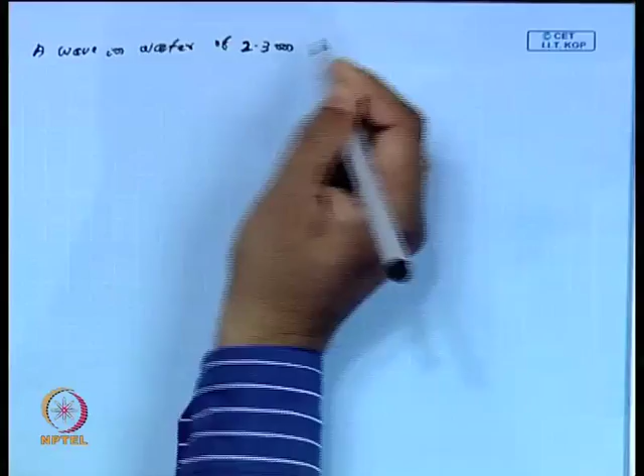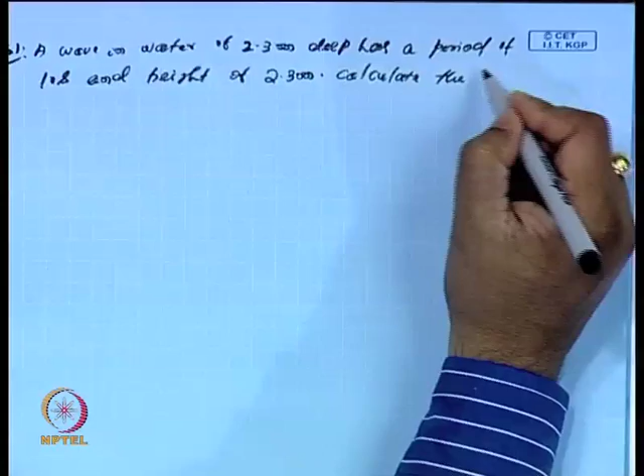Let us start with a simple example, example 1. Suppose a wave in water of 2.3 meter deep has a period of 10 seconds and height of 2.3 meter. Now you need to calculate the wave celerity and length, basically the wavelength. So this is the question.

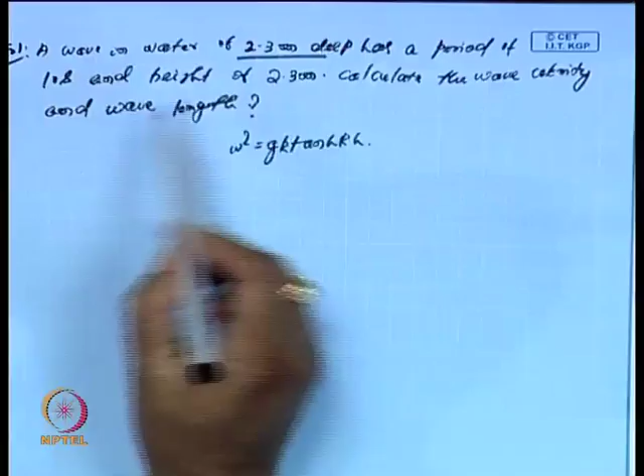If you look at omega square for any wave, the dispersion relation is omega square equals gk tan hyperbolic kh. Suppose the wave is in 2.3 meter deep water, so water depth is very small, and period is 10 seconds. The height is 2 meter. So water depth h is given as 2.3 meter, and capital H, the water wave height, is 2.0 meter, and we have t as 10 seconds.

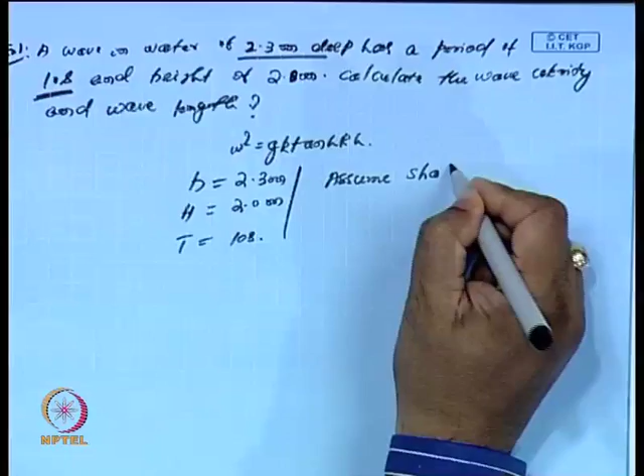If I assume shallow water, I assume this water wave is of shallow water waves.

Then, as per definition, c square equals gh, so c square equals 9.8 into 2.3, and c in meter per second becomes 4.75 meter per second. Since c equals lambda by t, and t is given as 10 seconds, this becomes 4.75 meter per second, which implies lambda equals 47.5 meter. So this is my lambda.

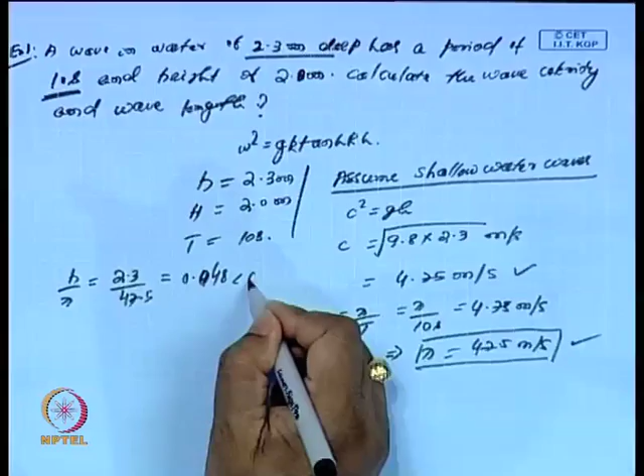So wave celerity and wavelength we have seen. Now I started with the assumption that this is the shallow water case. What happens in case of shallow water? Then h by lambda will be 2.3 divided by 47.5, and this ratio gives 0.048, which is less than 0.05. So the condition is satisfied, which implies this is the case of shallow water waves.

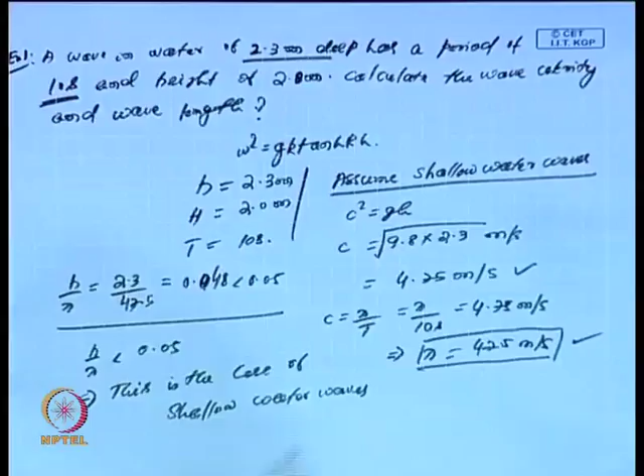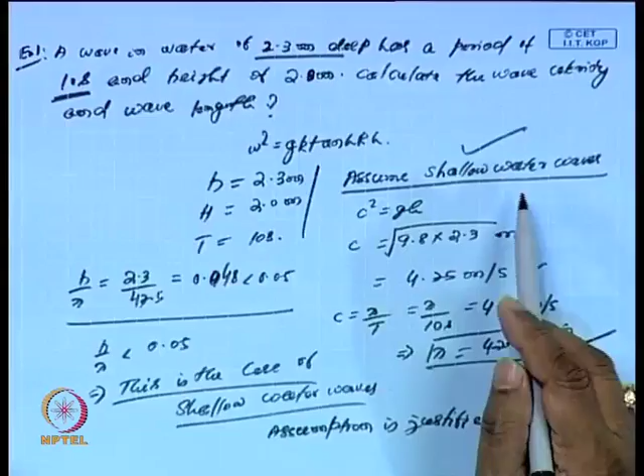So this is the case of shallow water waves. I started with an assumption of shallow water waves, and this assumption is justified. So lambda is 47.5 and c is 4.75, and this is true because the assumption is valid. Because of this assumption, the problem becomes easy; otherwise I would have had to solve the original equation, omega square, but this simplified it to a large extent.

Now I will go to another example, example 2. Suppose a wave in water of 100-meter deep has a period of 10 seconds and a height of 2 meter.

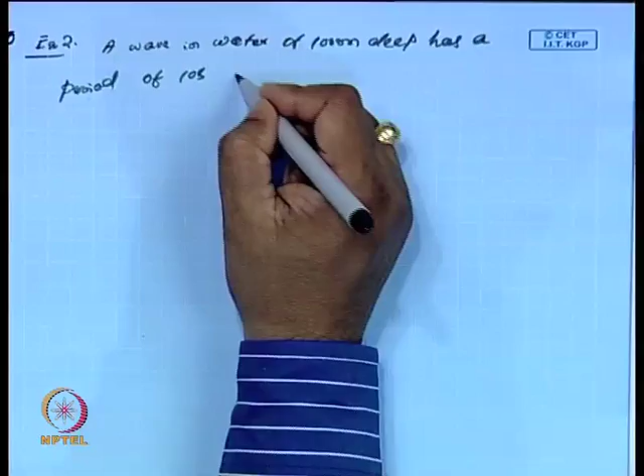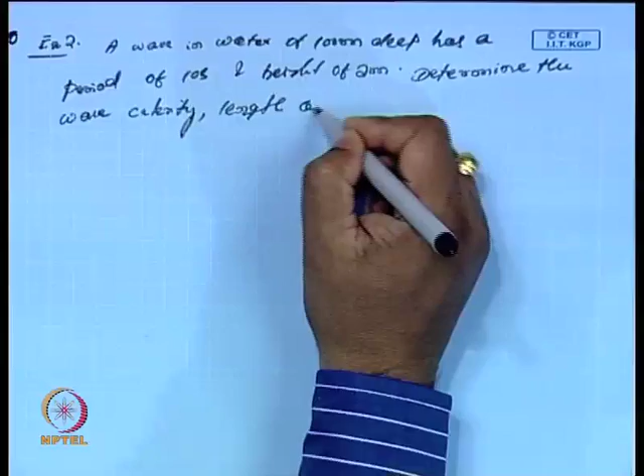Then it says determine the wave celerity, length, basically the wavelength, and steepness. So to do that, I assume because it is a 100-meter deep water, my h is around 100 meter, it has a period of 10 seconds, t is 10 seconds, and height capital H is 2 meter.

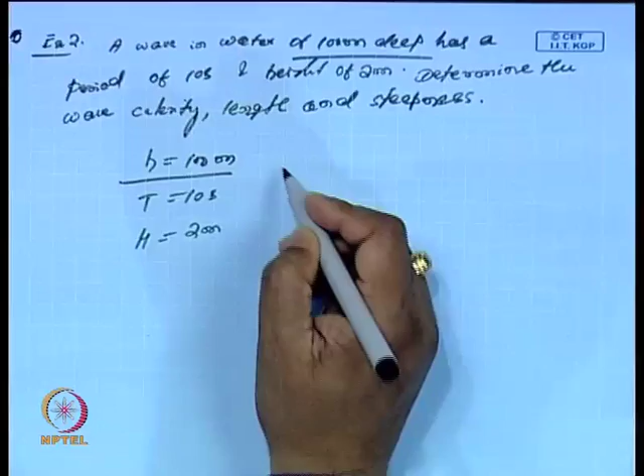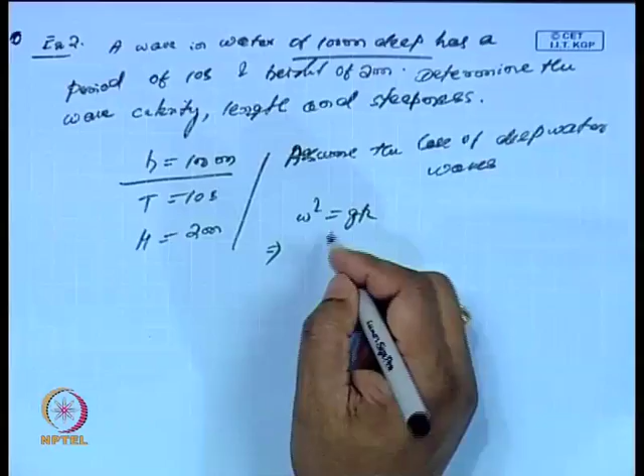So if I assume the case of deep water, assuming the wave motion is in the case of deep water waves, then when omega square equals gk in case of deep water, I can easily get lambda equals 1.56 into t square. If you put omega equals 2 pi by t and k equals 2 pi by lambda, one easily gets this from the equation.

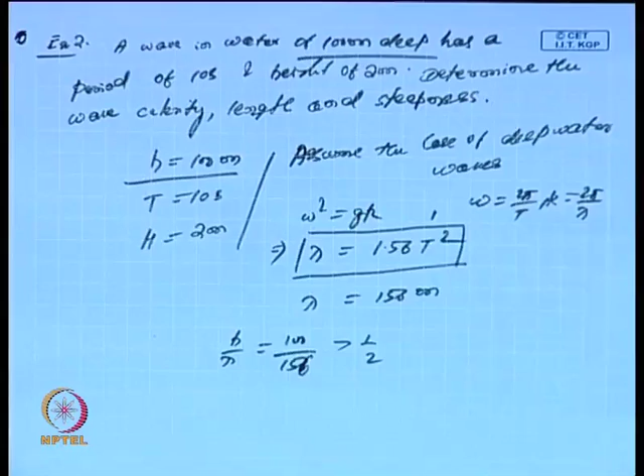I have been given t is 10 seconds. So if I put t equal to 10 seconds, then lambda is 156 meter. And again, if lambda is 156 meter, then I look at h by lambda: h is 100, lambda is 156, and that ratio is greater than half. Hence, this deep water assumption is justified.

Is valid. Now once this is valid, what I have been asked is what is my c. C is nothing but lambda by t, 156 by t which is 10, so this is 15.6 meter per second.

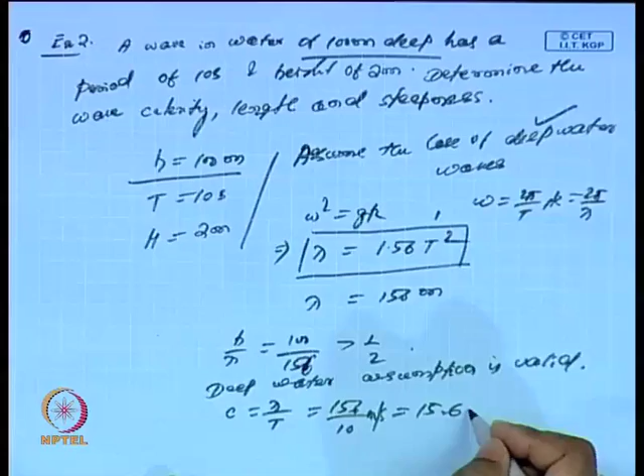Then again, wave steepness, that is your h by lambda. H is given as 2 meter, lambda is 156, and that gives me 0.013.

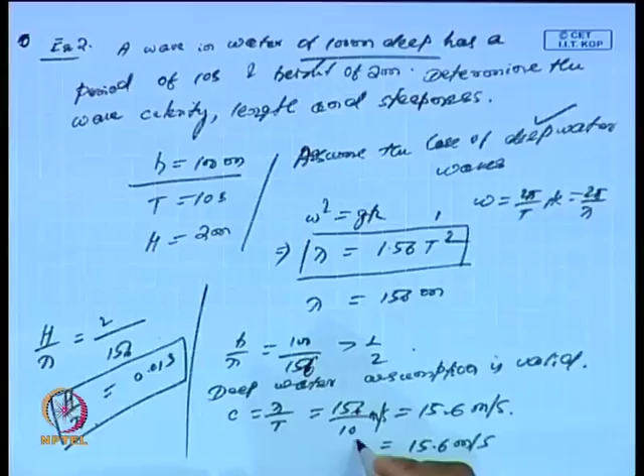That is my h by lambda, the wave steepness. And this is c, so we have c is 15.6 meter per second, and lambda is 156 meter. So initially lambda is this, c is this, and h by lambda is this.

So in these two examples we have seen the assumption of whether it is a deep water assumption. Fortunately we are lucky that our assumption has become justified, so we could easily do this calculation. On the other hand, if this assumption is not valid, this condition will not hold good. In that case, I may have to solve the original equation to find exactly the wave behavior.

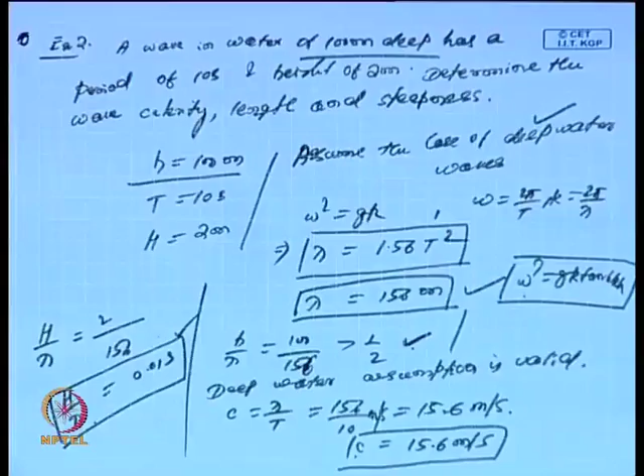I have tried to search the tan hyperbolic relation - this is the water wave dispersion relation. So often we have to approach numerical methods, even though in the previous case it was possible because we could handle it directly, since the assumption of deep water was also a valid assumption.

So now with these two simple examples, I will go for another example where the propagation of a wave is from deeper water to shallow water. Let us see another example of a wave from deep water to shallow water. Suppose in the last two examples we have seen that the wave propagates with no change in water depth.

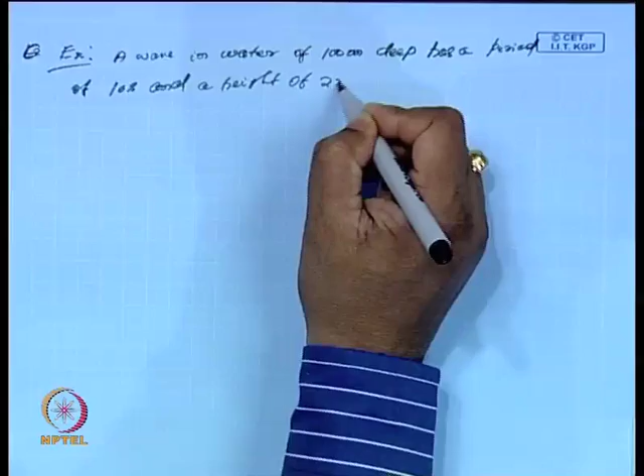Now suppose I have a wave in water of 100 meter deep, has a period of 10 seconds and a height of 2 meter. When it propagates, when it is propagated into a depth of 10 meter...

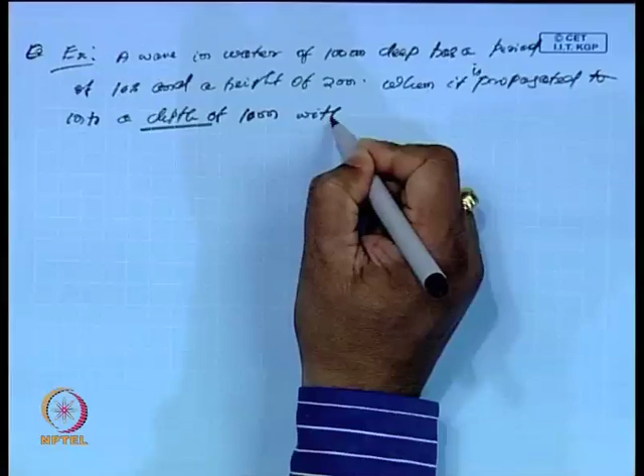...when it is propagated into a depth of water of 10 meter without any refraction, let us determine the wave height and the water particle velocity.

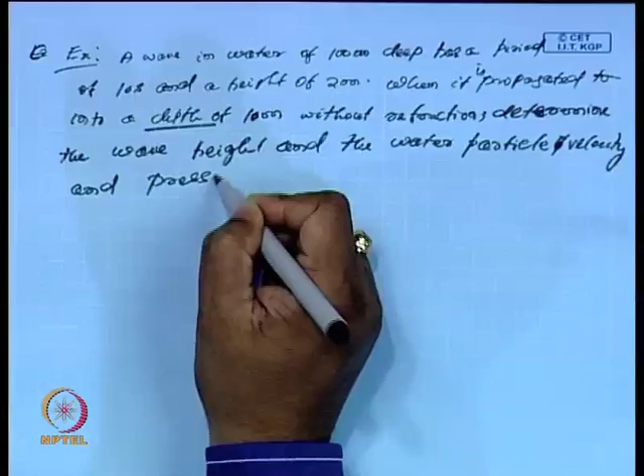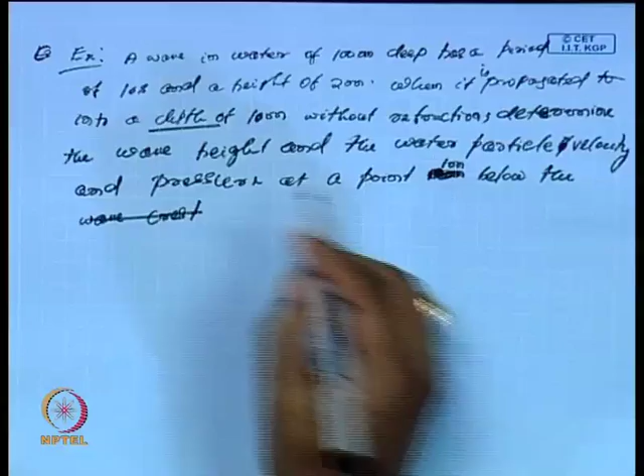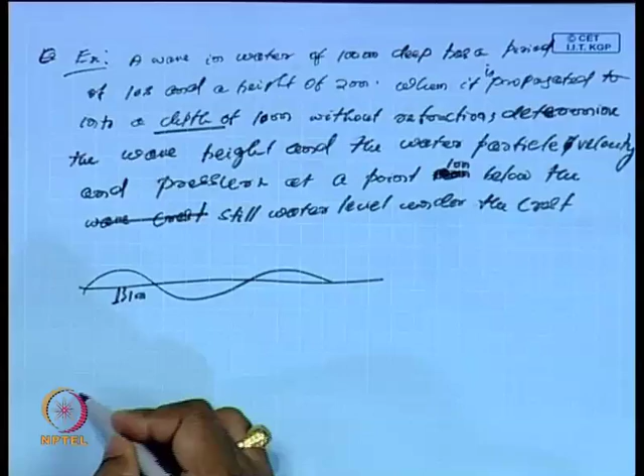Water particle velocity and pressure at a point 1 meter below, sorry, 1 meter below the still water level under the wave crest, under the crest. So that means I am looking at, if this is mean water level, I am looking just at this point. If this distance is 1 meter below the water depth, my initial water depth, so initially the depth was 100 meter, h was initially 100 meter.

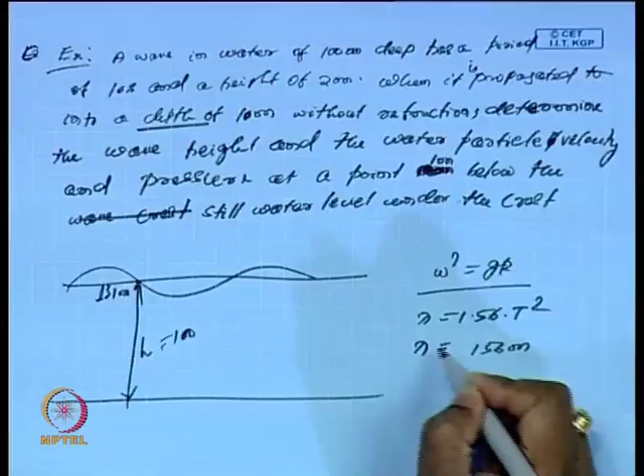So in this case, omega square is gk, assuming this is initially in the deep water wave regime. Then we know lambda is equal to 1.56 into t square, and t is 10 seconds, so it will be 156 meter. So lambda is 156 meter initially, and this wave was propagated.

If you look at this assumption, because I have taken this under the case of deep water, we have just seen in the previous example that this assumption is valid because h by lambda is 100 by 156, which is greater than half. So this is a valid assumption.

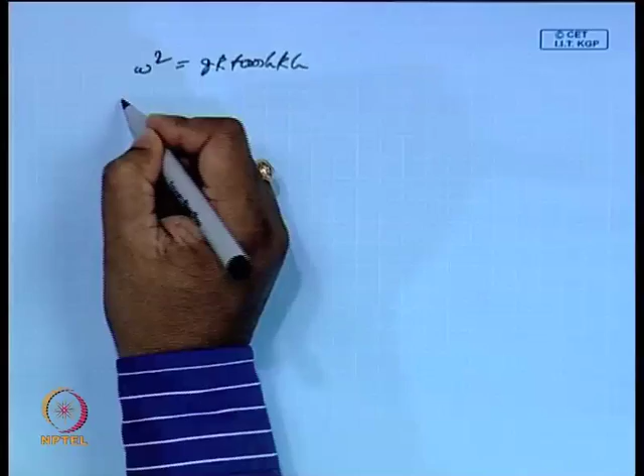Now when this wave has propagated to a depth of 10 meter, what will happen? If we look at our original equation, omega square is gk tan hyperbolic kh, we have been given t is equal to 10 seconds and our h is 10 meter.

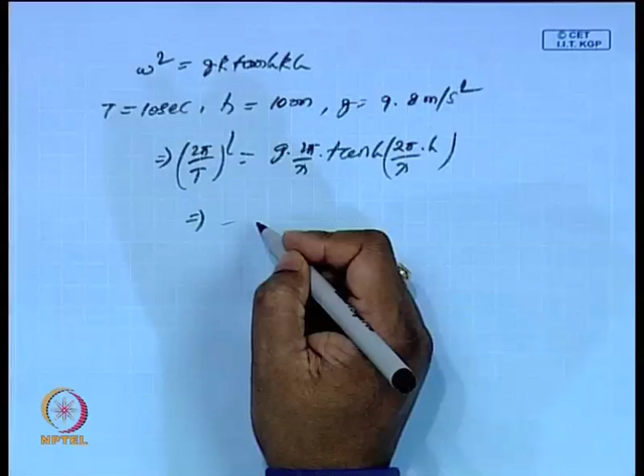If h is 10 meter and g is 9.81 meter per second square, you can easily see if you substitute for t, where omega is 2 pi by t, square is equal to g into 2 pi by lambda to tan hyperbolic 2 pi by lambda into h. If you substitute for t, g and h, and find the solution for lambda, then one can easily see that lambda will be 93.3 meter. This will be lambda.

It can be checked. One can apply the fixed point iteration method or the bisection method to find this lambda by solving this equation, because t is known, h is known, g is known.

Once lambda is known, then we have k is equal to 0.0673, because k is nothing but 2 pi by lambda, and it is in per meter.

That is my wavelength, a wave number, and then my n is, in general, n is equal to half of 1 plus 2kh by sin hyperbolic 2kh, and this gives me, if I substitute for k and h, that will give me 0.873. So, in fact, we know that n is equal to half in case of deep water, where n is equal to 1 in case of shallow water.

So this n itself, the value shows that it is the case of intermediate water depth, 0.873, because it lies between half and 1.

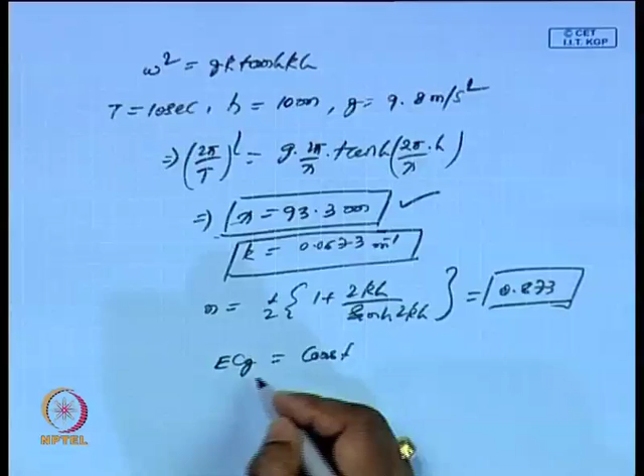So if I take this value, that means lambda n h square at h is equal to 100 meter is same as lambda n h square at h is equal to 10 meter, because initially the wave was in 100 meter deep, and then it has come back to a depth of 10 meter.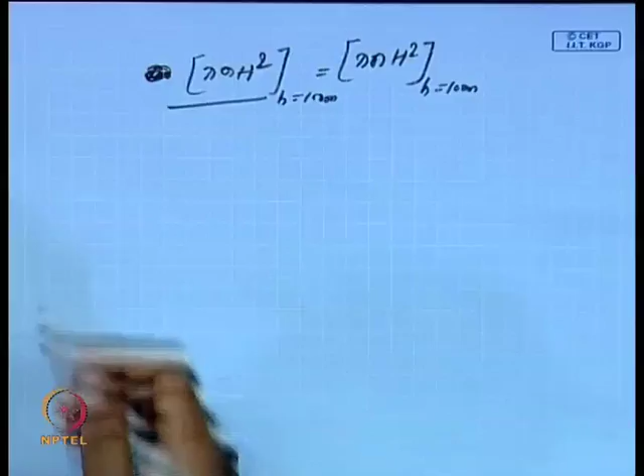So if I substitute, and in case when h is 100, we have seen that this is the case of deep water. So in case of deep water, n is equal to half, and in case when h is 10, we have already seen n is equal to 0.873.

Substitute for n from both sides, and the initial wave height was, we have initial h 100, the wave height initially it was 2 meter, and my lambda was 156 meter. So this was lambda 100, and then I have seen that my lambda 10 is 93.3.

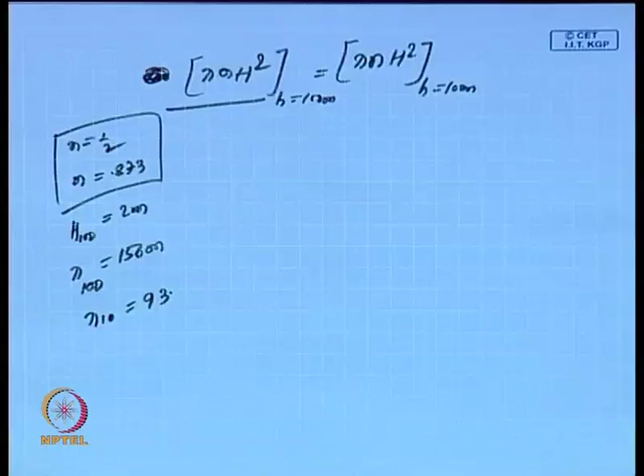So my lambda I have seen is 93.3 meter. So if I substitute these values along with this, then I will get my h10, the wave height at the depth of 10 meter, that will give me 1.97 meter. This is the wave height. So there is a small reduction in the wave height from 2 meter to 1.97 meter. This is what we have obtained by this result, and this is nothing but the conservation of energy flux.

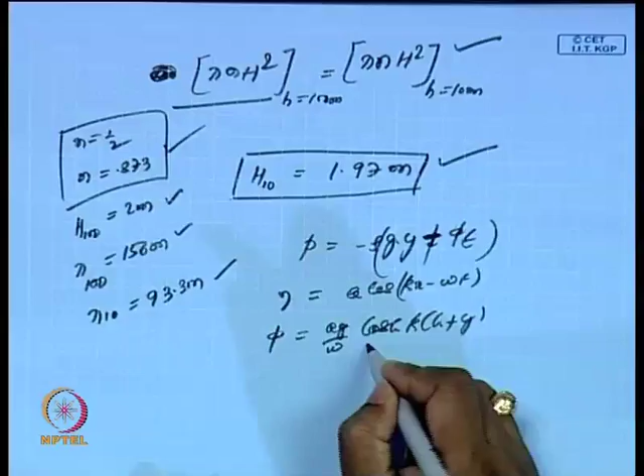And if this is the case, then I have eta is, suppose I assume eta is equal to a cos(kx minus omega t), then my phi will be a g by omega cos hyperbolic k into (h plus y), or a g by omega cos hyperbolic k(h plus y) by cos hyperbolic kh, into sin(kx minus omega t), and then we have this.

If we substitute for eta and phi and p, and again y is equal to minus 1 below the crest, this will give me, my p will give, it can be easily seen that it is 19,113 Newton per meter square. So this will give me the pressure, the hydrodynamic pressure.

And again, if I calculate the horizontal velocity, particle velocity, because phi is there, u is nothing but phi x, and then below the crest, 1 meter below the water surface, this will give me 1.01 meter per second. So this can be checked by substituting for these values, and then one can easily obtain this.

So we have the three examples we have solved. First case, we started with a very simple example of shallow water waves, then went to a case of deep water waves. The third example is very interesting because we are able to know how the wave height changes due to the change in water depth, and also how one calculates the pressure and the components of velocity, particularly the horizontal and vertical components of velocity of the water particles. This is a very clear example.

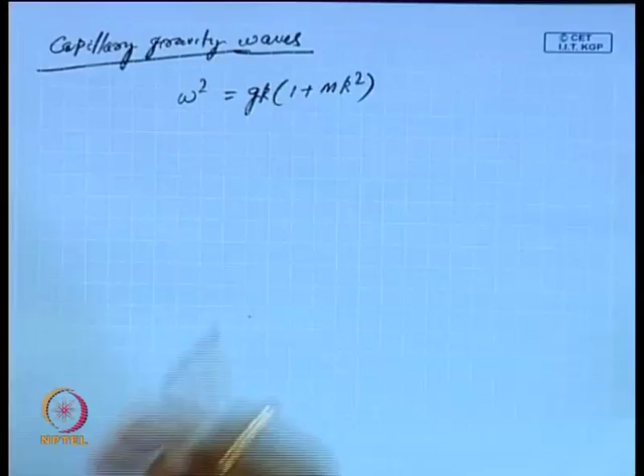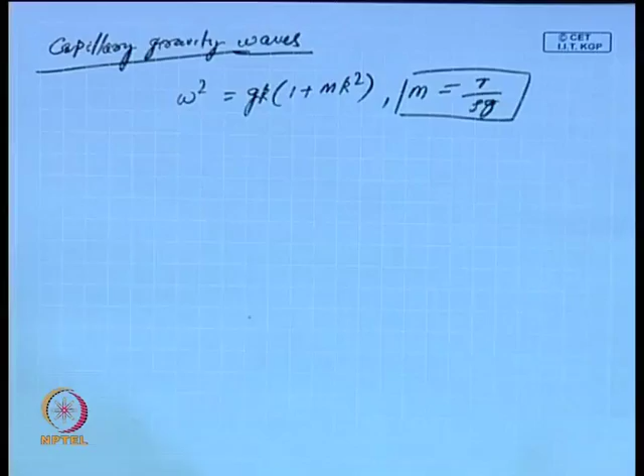The problem is like this: we know that in case of capillary gravity waves, the dispersion relation is omega square equals gk(1 plus mk square), where m is t by rho g. Here t is the coefficient of surface tension, g is the gravitational acceleration, rho is the density of water, omega is the wave frequency, and k is the wave number associated with capillary gravity waves. Sometimes we write this as capital K equals k into (1 plus mk square), where capital K is also omega square by g, or into tanh(kh) in general.

Now, what happens in the case of deep water? When kh is much larger than 1, we get K equals small k into (1 plus mk square). Since k is omega square by g, that gives omega square equals gk(1 plus mk square), and then omega square by k square equals g by k times (1 plus mk square), which can be written as g by k plus gm into k.

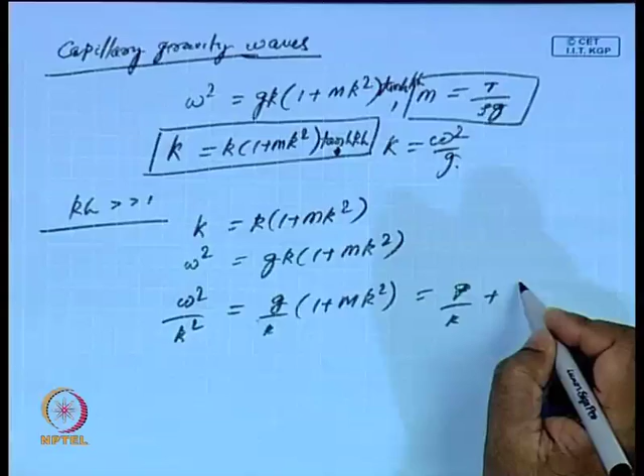So g by k plus gm into k. If I call this c square, what happens to dc by dk? Taking the derivative with respect to k, this gives minus g by k square plus gm. Setting this equal to zero, since c is not equal to zero, dc by dk equals zero gives the optimum value.

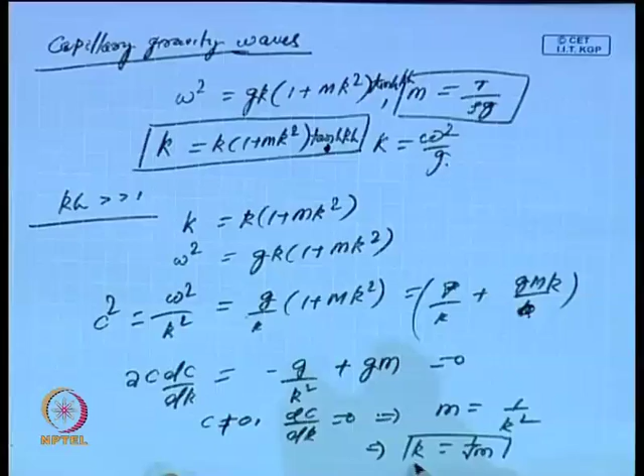Once dc by dk is zero, this implies m equals 1 by k square, which implies k equals 1 by root m. So it can be easily seen that for this value of k equal to 1 by root m, c will attain an optimum — it can be checked whether it's a minimum or maximum, but it turns out that when k equals 1 by root m, c becomes c minimum.

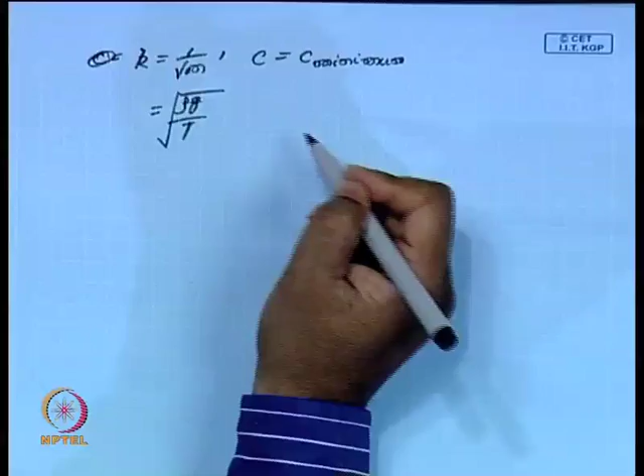This can be checked: once k equals 1 by root of m, m is t by rho g, this gives k equals root of rho g by t, so that c equals c minimum. What is this c minimum? Let's call it Cm.

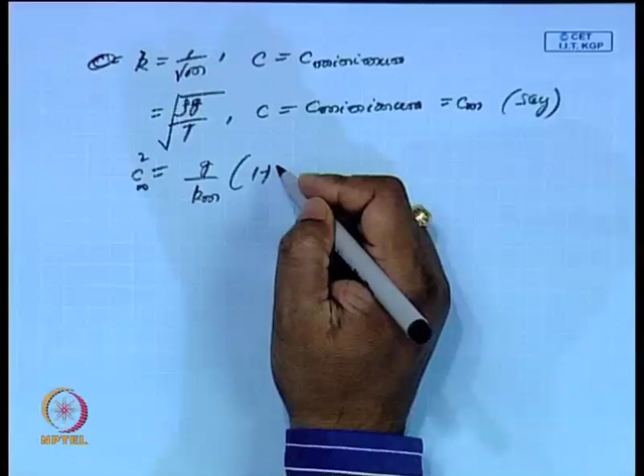So, considering the case of deep water, Cm square equals g by km, that is g by k into (1 plus k m square), and that will give us...

So if I take g... since m km squared is 1, because k is 1 by root m so km is 1 by root m, for c equal to cm we get 2g by km. And since km is root of rho g by t, that is 1 over k equals root of t by rho g, this gives 2g times t by rho g, which simplifies to gt by rho.

So this will give me this. So Cm, that means my C minimum, becomes 4 gt by rho, and my Km is equal to 1 by root m, which is nothing but rho g by t. So for this k equal to km, c becomes Cm, that means minimum value of speed of the flexural of the capillary gravity waves.

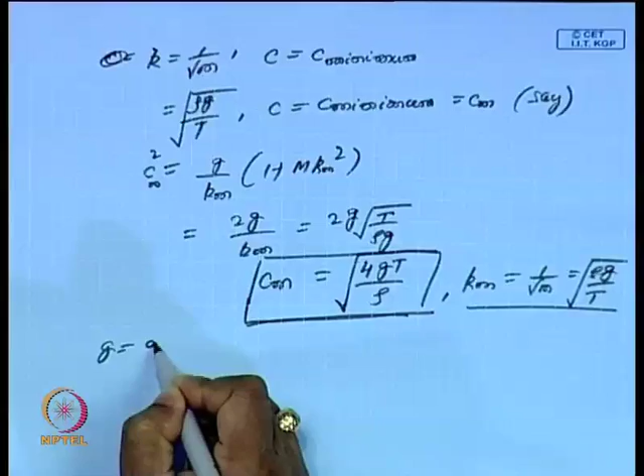Let me take one typical case: if g is equal to 9.8 meter per second squared, rho is 1000 kg per meter cube, and T is equal to 0.074 Newton per meter, then we can see that C minimum is equal to 23 centimeter per second, and corresponding lambda m, since km is this, lambda is 2 pi by km, and lambda is 1.7 centimeter. So for these parametric values, Cm is 23 centimeter per second, and lambda is 1.7 centimeter.

That means when a wind blows, this is the minimum speed which can be attained. Below that, in this case of capillary gravity waves, when a wind blows and begins to blow over a flat sea surface, no wave will be possible below c equal to Cm. When c is less than Cm, no wave motion will be possible, because the speed is minimum here. So below that no wave motion is possible, and in fact it has been pointed out that perhaps that is the smallest possible wave among all wind generated waves.

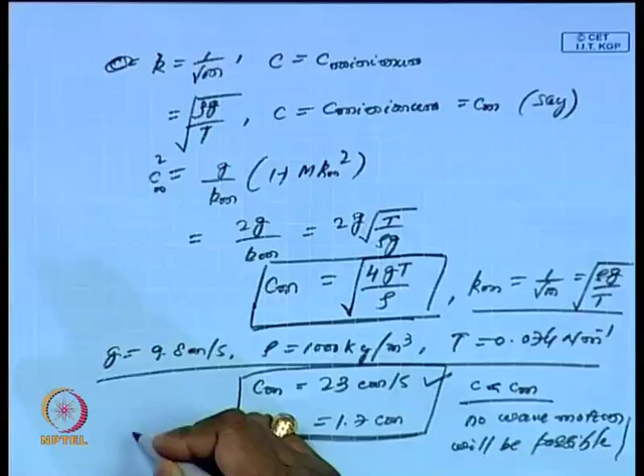This wavelength lambda and the corresponding Cm is perhaps the smallest possible wave that exists in the ocean, particularly when you look at the gravity waves or the wind generated waves. So this is one of the very important examples of the wave propagation problem, showing how small a wavelength can be: 1.7 centimeter, very small.

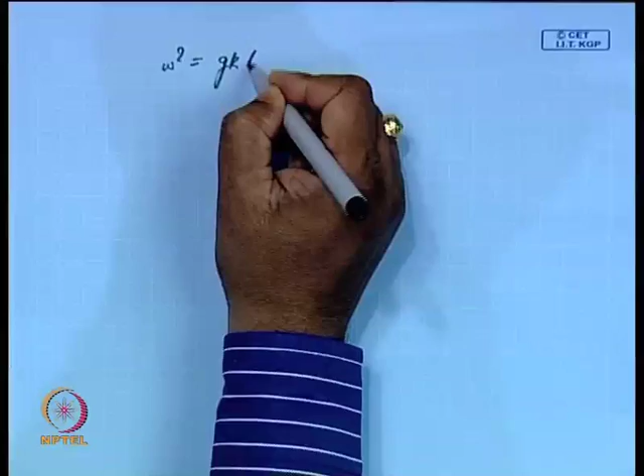Now this is one aspect. Let me work out another case in the same line, suppose I have been given omega square is equal to gk(1 plus mk square) tan hyperbolic kh. This is my dispersion relation.

So what will happen here, from 2 omega d omega by dk, that will give me g by... taking the derivative on both sides, after a lot of simplification I can get d omega by dk is equal to 1 by 2, omega by k, into 2kh by sin hyperbolic 2kh, plus (1 plus 3mk square) by (1 plus mk square).

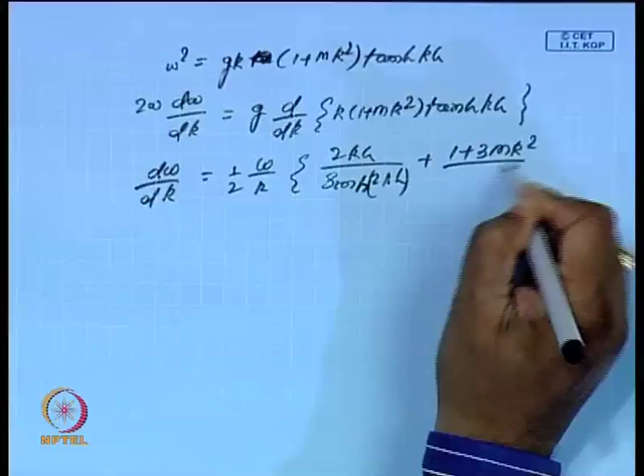And that is same as c by 2, [1 plus 2kh by sin hyperbolic 2kh, plus 3mk square] by (1 plus mk square). So this is my d omega by dk, that is Cg, and this definition is the group velocity associated with the capillary gravity waves.

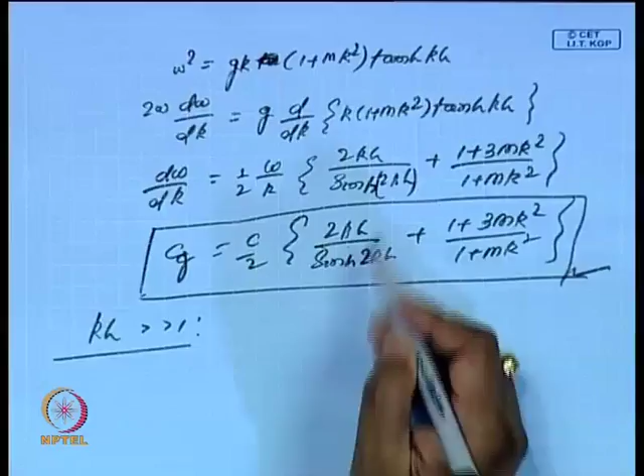This is one of the most general results. And if I say that kh is much greater than 1, then this quantity will be 0, so my Cg will be c by 2, (1 plus 3mk square) by (1 plus mk square). This can be further simplified to write it as 1 by 2 into root over of g by k, [root over of (1 plus 3mk square)] by [root over of (1 plus mk square)].

This is your Cg. And it can be seen again if I assume that Cg will be minimum, so if I say that dCg by dk is 0, that will again give me Cg minimum, and it can be seen that...

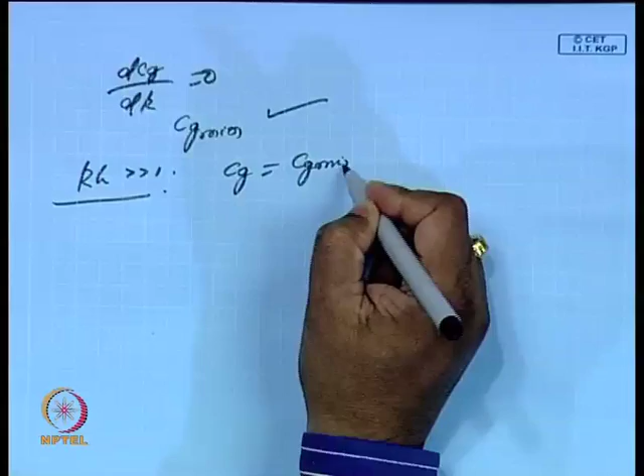...in case of deep water, when kh is much greater than 1, then Cg is equal to Cg minimum, that means group velocity will attain the minimum only when mk square is 2 by root 3 minus 1. For this value, Cg is minimum.

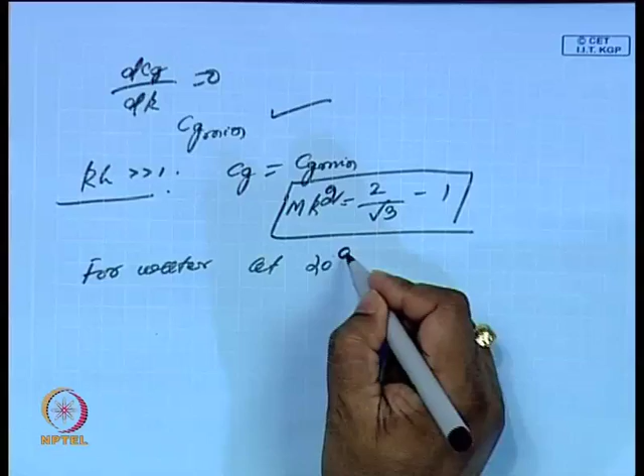Now let us go back to see what exactly happened. It has been seen that for water at 20 degree Celsius, we can say that rho is equal to 1000 kg per meter cube, and we have T is equal to 0.074, the same example, Newton per meter. Then it can be shown that in that case Cg will be 17.8 centimeter per second.

That Cg is Cg minimum. So this is what happens in case of deep water, this case. So this is another example which suggests how the wave propagation, how the group velocity can be obtained, also minimum group velocity can be obtained in case of capillary gravity waves, and in both cases we have only analyzed the dispersion relation.

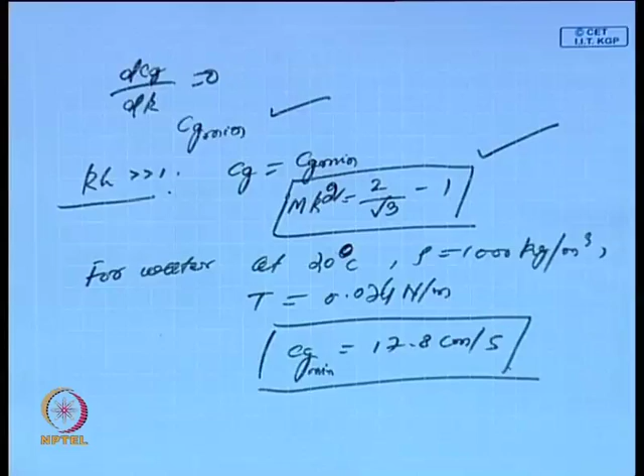Now with these two examples I will work out one or two more examples, because these are all worked examples, a mixture of examples associated with what I have considered in my last 8 to 10 lectures. So I am going through various aspects of the problems. Now, we have already seen the case of a wave oscillation in a tank.

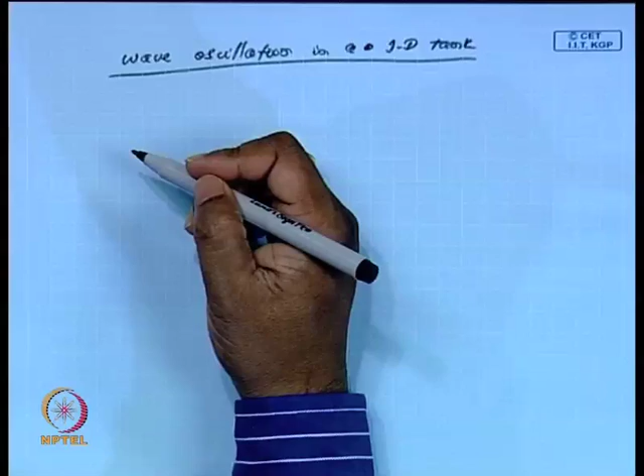In a one dimensional tank, the question comes: what happens if the tank has length and breadth? For the one dimensional tank, we have seen the case of bay oscillation. We have seen that in case of a rectangular bay, one dimensional bay, Tn is 4L by 2n minus 1 into root gh.

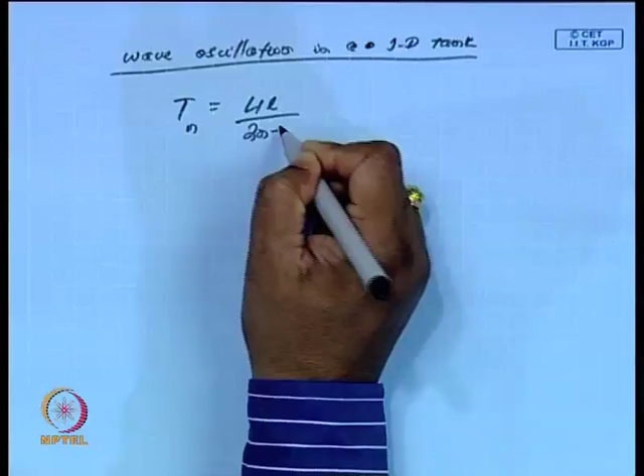But if you look at recent tsunami interval time charts or in any other regions, this formula assumes the water depth is uniform, H is same. But if the water depth is varying over the basin, then what will happen to my Tn?

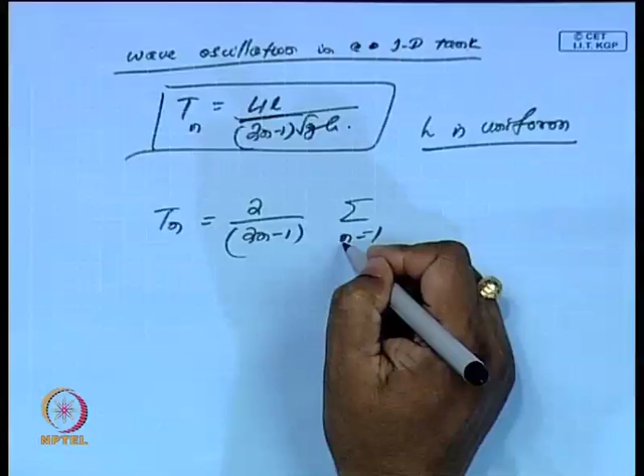It has been found that some empirical formula can be used in such a case. Tn is 2 by 2n minus 1 into sigma, i is equal to 1 to k, such changes in the water depth, where li by root over of g hi.

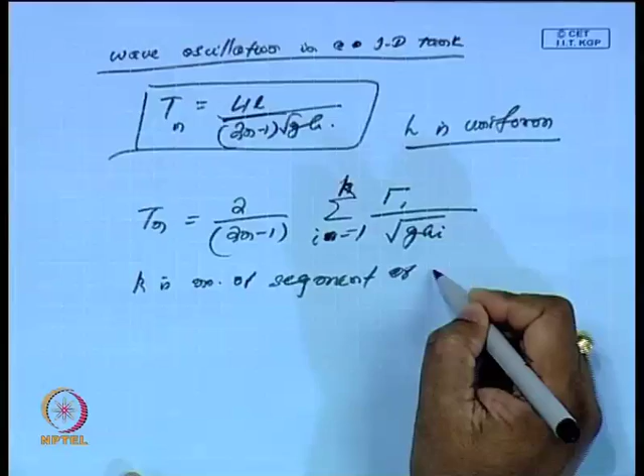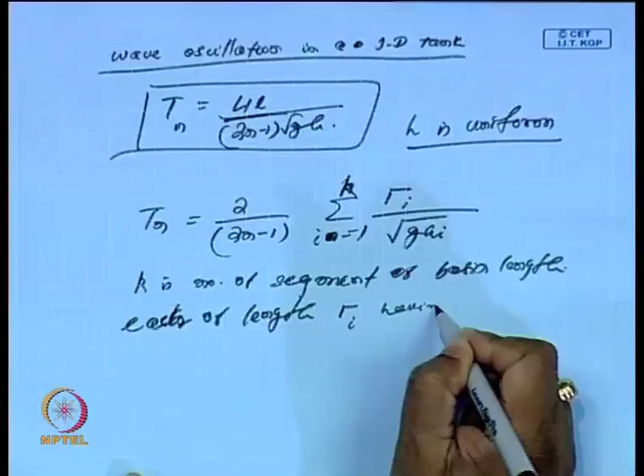So gamma i is defined such that k is the number of segments of the basin length, each of length gamma i, having water depth Hi. This is the formula normally used to calculate the period of oscillation of a bay during bay oscillation.

This applies when there is bottom depth which is varying and has k such different segments, each segment of length gamma i and depth Hi. This is one result which is used many times in tsunami interval time charts. This is a one dimensional result. Now I will go to the case of a two dimensional basin.

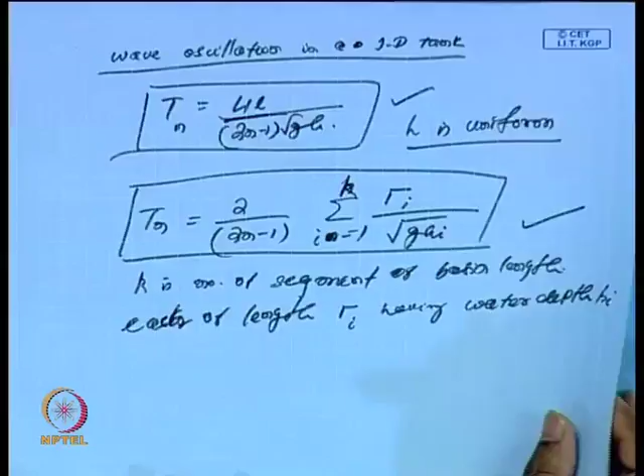What will happen if I consider a two dimensional problem? Suppose we start with a basin, wave oscillation in a basin. If I have a basin oscillation, and the basin is of length A and breadth B, length A, breadth B, and depth H.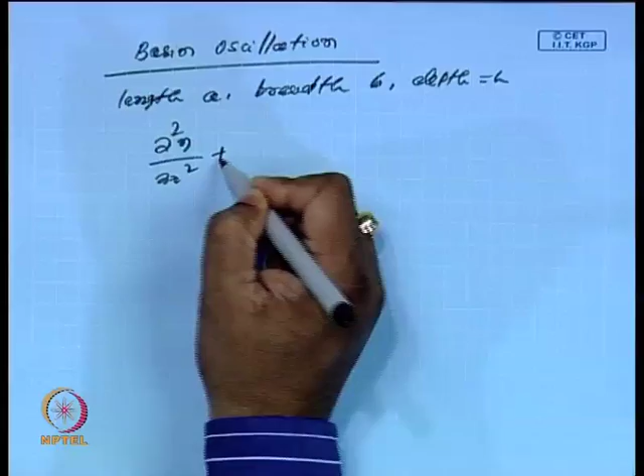In that case, if we look at the shallow water equation, it has to satisfy del square eta by del x square plus del square eta by del y square equal to 1 by c square del square eta by del t square, because this is the wave equation, where c is root gh.

C is root gh. Then, if I assume my eta is of this form, eta x y times e to the power i omega t, then it will also satisfy a simple relation, because I am separating my eta by eta bar.

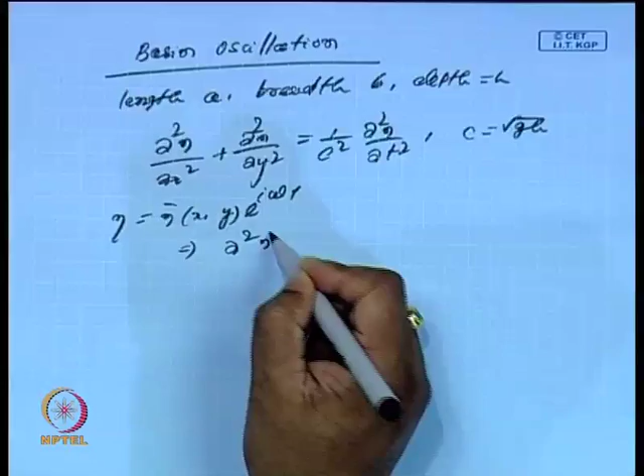So it will give del square eta bar by del x square plus del square eta bar by del y square plus k square eta bar is equal to 0. This becomes independent of time in there. Eta bar is the spatial component of the surface elevation.

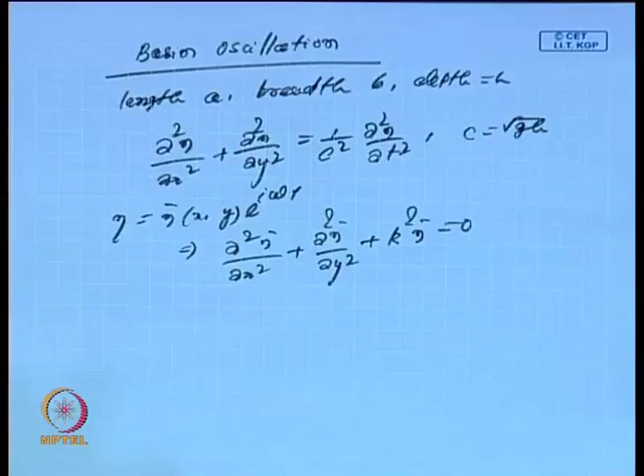And then we can see, because I have a basin of length A and breadth B - this is the plan view - then del eta by del x will be 0, because horizontal velocity is 0, and from that we get del eta by del x is 0 at x equal to 0 and A.

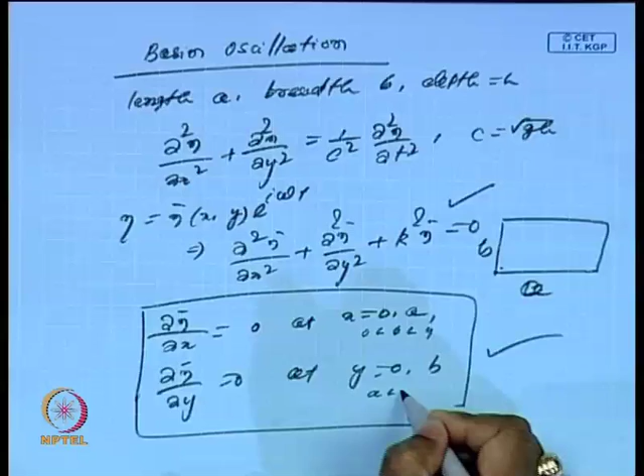Again, del eta by del y will be 0 at y equal to 0 and b. These 4 conditions it has to satisfy, meaning we are solving this equation subject to these boundary conditions on the 4 sides of the wall, where 0 less than y is less than b, and 0 less than x is less than a.

So, if I look at this, one typical solution of this equation will be the reduced wave equation. Eta bar xy is equal to sigma m is 0 to infinity, a mn cos m pi by a into x, into cos n pi by b into y. Eta bar xy will be this. And again we can see that because this has to satisfy the reduced wave equation, it can be easily seen that my k square is equal to pi square m square by a square plus n square by b square.

This is my k square. K has to satisfy this relation. And further we can see that, because c is lambda by t, and c is nothing but root gh, we can see that my t is lambda by root gh, and if I substitute k as 2 pi by lambda, that will give me 2 by root gh into m square by a square plus n square by b square. So this is what my t becomes. And here t is no more simple, because t depends on both the modes of oscillation.

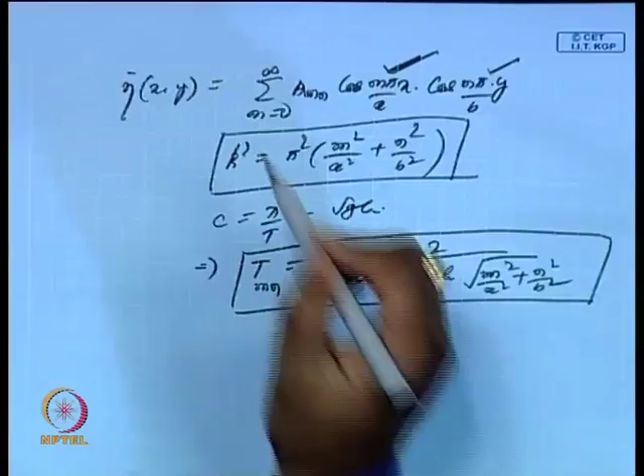One is associated with the horizontal direction, the wave mode along the x axis, and this is the wave mode along the y axis. So in the process my Tmn depends on this. And if you look at this, the Tmn depends on the waves that oscillate, and in the process this eta bar will depend on m and n. So there will be two summations, because m will vary from 0 to infinity, and this is also 0 to infinity, so there will be a double summation.

In the same way, suppose I look at a bay which is open on one side. Suppose this is x is equal to 0, and this is the line y is equal to 0, this is y is equal to B, this is x is equal to 0, this is x is equal to A, and suppose this side is open. This is the open side, then this is a bay oscillation.

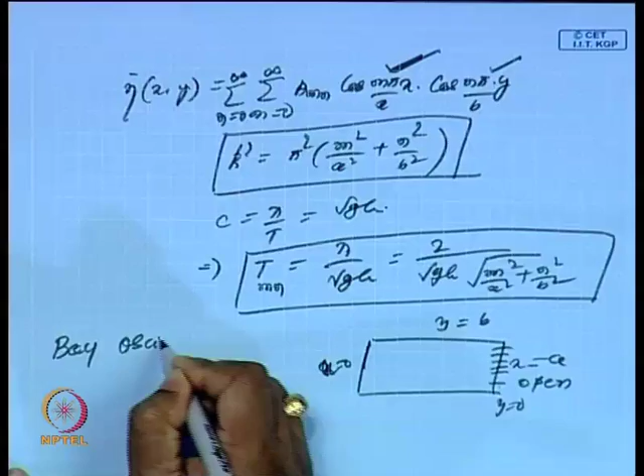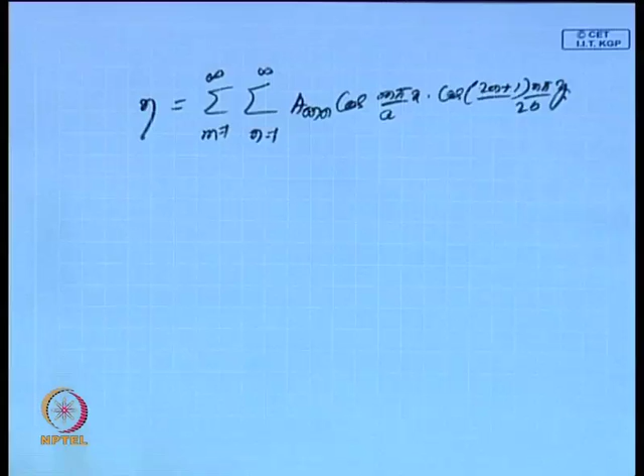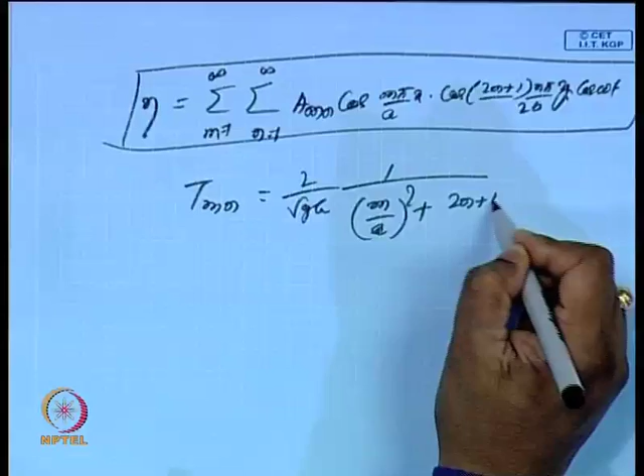And again if you look at the Tmn, in this case the Tmn will be 2 by root gh, 1 by m by a square plus 2n plus 1 by 2 into by b square, rather something like this. This can be checked.

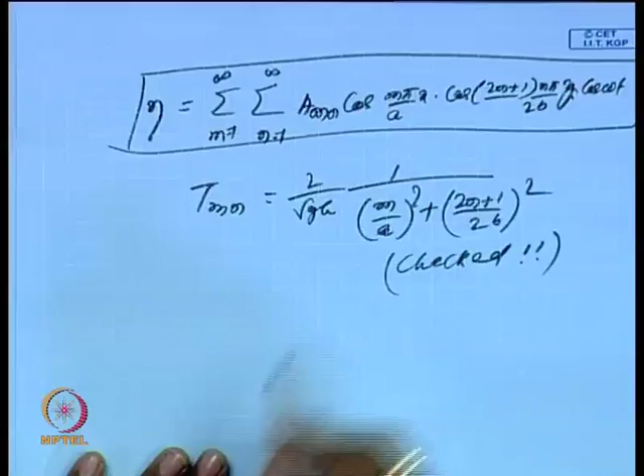So this is in case of a bay, and here it depends on the modes of oscillation both along the x axis as well as along the y axis, because it is a 2-dimensional basin. This is in case of a rectangular basin.

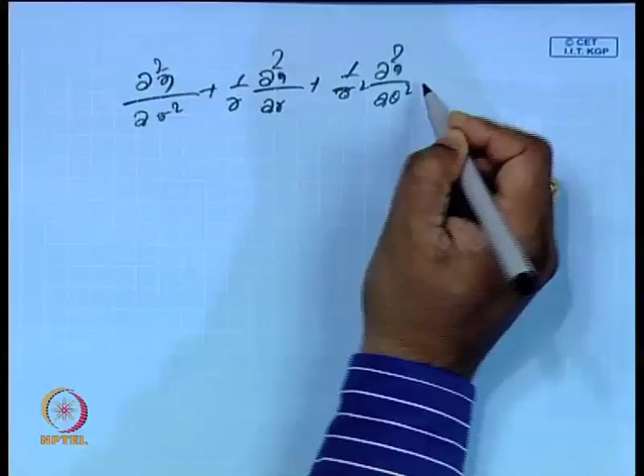What happens in case of a circular basin, circular lake? I will not spend much time on this, but I will briefly mention that if the bay becomes circular, then instead of xy, it will satisfy, if in r theta coordinates I write my equation of motion, del square eta by del r square plus... and if I write my eta r theta as f of r, e to the power i s theta, just a simplification assuming certain symmetry in theta, then it will satisfy: f, del square f by dr square plus 1 by r df by dr, k square minus s square by r square, f is 0.

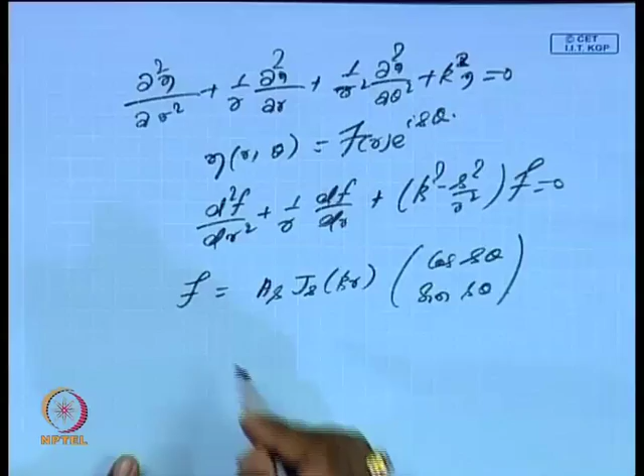And that gives me my f will be of this form, A s J s k r into cos s theta or sin s theta, one of them. So this will be the general form of the eta, and again this will be the general form of eta.

Eta r theta will be of this form. This can be easily checked, and in fact this can be found in most textbooks. Once this is established, what will happen if I say that del eta by del r at r equal to a on the boundary is 0?

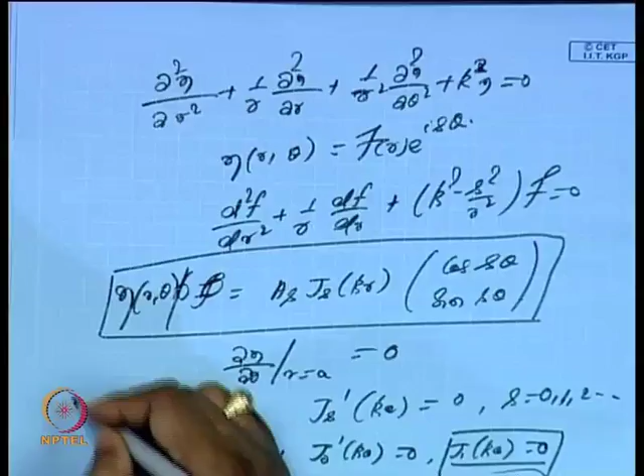It is because the j1 k functions behave like this. So it will have zeros here, here, here, here on this axis, and although it decays at far field, it has finite amplitude near the wall, and it will have many roots.

But if you look at what happens to k, we will see that this infinite number of roots will give us infinite modes of oscillation, and that is what we are seeing also in case of a rectangular basin or a rectangular bay, whether it is one dimensional or two dimensional.

Here for s you have taken the case of 0. If you take s equal to 1, 2, 3 onwards, we will also get several such values, because for each s you get the corresponding j s prime k 0, and if you look at the solutions of those Bessel functions, you will get infinitely many solutions.

That will give us infinite modes of oscillation. So whether it is a closed or open basin, of any kind of geometry—circular, rectangular, open or closed, one dimensional or two dimensional—we have several modes of oscillation, and in most cases the first few modes play a significant role.